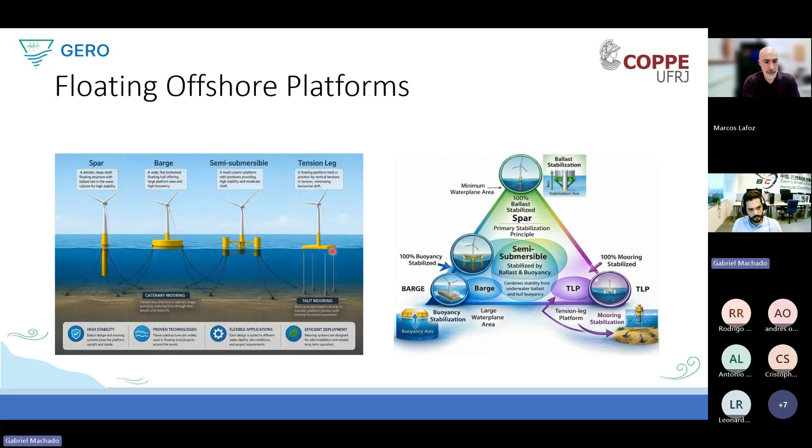So this way, of course, we have mixed these concepts into different kinds of platforms, but these four are the main four types of platform. And we also have the different types of mooring systems, that is the catenary system and the taut mooring system. The taut mooring is the one that is the tension leg that is stabilized via the mooring system.

A little bit about the wave energy converters. We have mainly three types of wave energy converters. We have the oscillating water column. That is, we have a system that has two parts. One is inside the water, a small part here that is a column of water, and we have a little part here that is the air chamber.

So when you have the waves, they oscillate this column of water here inside. When we have this oscillation, the air inside the air chamber gets pressurized and generates the airflow through this air chamber. So when the water goes up, it pressurizes the air, so the air goes out. When the oscillation goes down, it depressurizes the air chamber, so the air goes inside.

So this way we have this water that oscillates in upward and downward direction and generates this airflow inside the oscillating water column. And this airflow drives a turbine here that can be a Wells turbine or a radial impulse turbine, many different turbines.

We also have the point absorber type, the buoy here, that is mainly a buoy that oscillates with the waves, and it's connected to a power take-off system. That is the mechanism, the device that converts these oscillations of the buoy into the actual power to deliver to the system. And we have the overtopping device, which is a little bit less common.

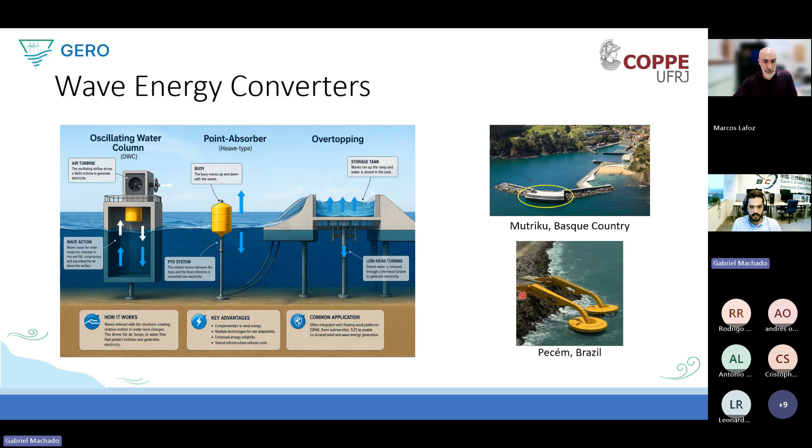And here I brought two examples that we have in the world. We have this Mutriku power plant, an OWC that I think is the most famous one, located in the Basque Country. And we have this other type in Pecém here in Brazil, that was developed by my advisor, Professor Segen, and it still works, and it's a very innovative concept too.

A little bit about the hybrid concepts. When we think about hybrid concepts, we mix two different technologies to produce power. So we have the primary one, the wind turbine, and we mix this wind turbine with different ways to generate power. I brought here the mix of wind power and wave power, but we can have solar, we can have different concepts too. I brought these concepts because they're the most famous and most conventional ones.

Almost all of these are semi-submersible with different technologies. We have this point absorber here, different types of point absorbers. This one is a torus-shaped point absorber. So these three are all about the buoy, different kinds of buoy, but all three are point absorbers. We have this one in Spain that is an oscillating water column mixed with the semi-submersible.

We have this one that was one of the primary ones, using the surge movement. So we have the surge movement of the platform generating power together with the wind turbine. And we have this concept here that is the one I studied when I spent my time in Italy, my internship in Italy.

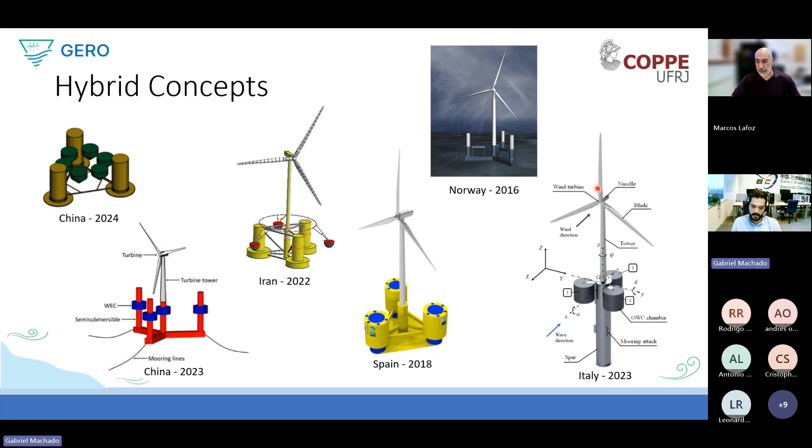So now the real topic of this seminar is about the methodology that we use to simulate these kinds of platform. We have to think that when we want more accuracy in the tests, in the simulations, we will get more computational cost. So when we get more accuracy, more fidelity, we have more computational cost. It's always like this. So if you have the simple methodologies, linear frequency domain models, we have a very low computational cost, but we have not too much accuracy.

So we have these kinds of linear frequency domain models that are based on the potential flow theory with Morison elements. We have the BEM, the blade element momentum, to simulate the aero part. And we can improve this methodology a little bit when we go to the time domain models. So we have partially or completely nonlinear coupled time domain models that are based on potential flow theory and Morison elements. We can combine these two together, and we have in the aero part the boundary element methods and the free vortex wake to simulate these time domain models more accurately than the other one.

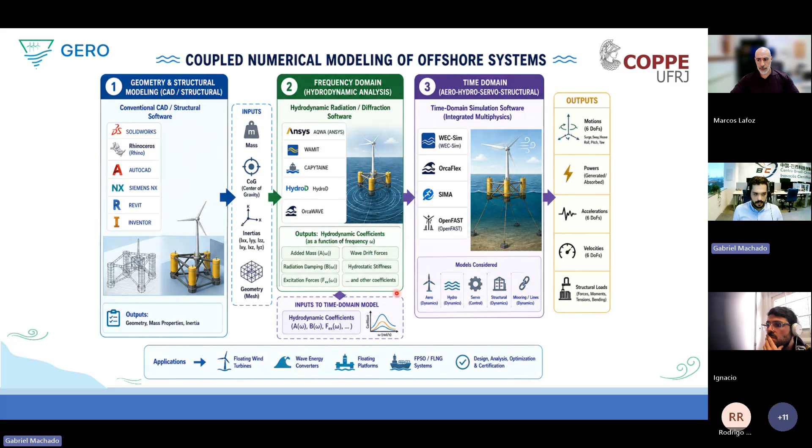So these models can be uncoupled or coupled models. So when you have the coupled model, it takes into account the aero part, the hydro part, the servo part, that is the controller, the structure, and the mooring lines all together in the same model. So this is the basics of the coupled numerical modeling of offshore systems.

So to talk a little bit more about each of these models, the first one is the structural model. When you want to create the structural model, we have to create the whole system, the whole platform that we want to simulate in one of the softwares. For example, here I use SolidWorks to model this platform that is a concept created by our group, GERO. And we have to model the whole platform with the internal structural configuration. We can put the material properties to see the correct mass of the platform.

So this way we can have also the structural model, we can have the loads, and we have to create all of these separately. For example, I can create the whole platform with one material, and we can create the ballast model separately. For example, here I create the ballast in water in the platform in concrete. So we can create these different materials to get the correct value of the mass, the COGs, the inertias. And we also have to create the tower model. We have to have all the positions, the mass for the tower to correctly implement this in this model.

So here I showed you a very small picture of the hybrid system that I work on. It is the conventional platform, that is just the wind turbine platform here, combined with the wave energy converters. So we have here one model that takes into account one OWC inside the columns, and another concept that takes into account the OWC external to the columns here.

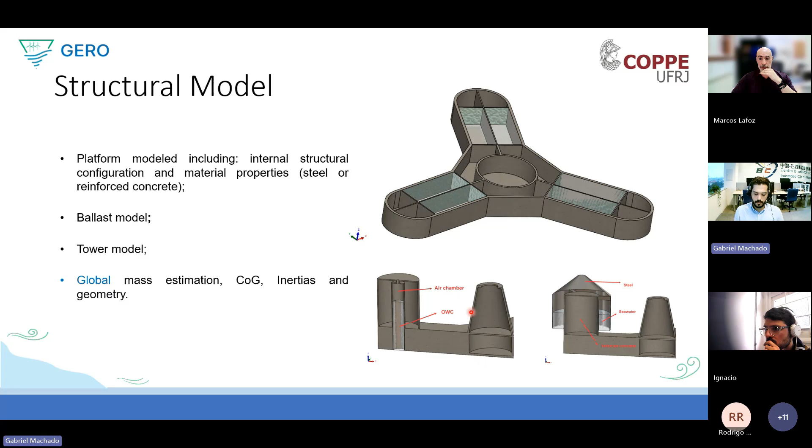So here I have three different materials. So we have the platform that is the concrete, we have the seawater here that is the oscillating water column, and we have the chamber here that is the steel. So when we put all of this together, we can get the global mass estimation in the correct form, the COG, the inertias, and the geometry in a correct way. We don't need to estimate anything. We have the correct values of all of this.

A little bit about the hydrodynamics. We have different methodologies. We have the low fidelity model, that is the first one that I mentioned before, that is the frequency domain model. We solve this equation here, that is based on the frequency of the waves. So the low fidelity model takes into account this. All of the software solve mainly this equation here.

And we have the medium fidelity, that solves this Laplace equation that is based on the Navier-Stokes equation, but we have to consider that the fluid is inviscid. This means without viscosity, incompressible and irrotational. So when we consider the Navier-Stokes equations and we put these parameters here, we get the Laplace equation, and we have to solve this Laplace equation to solve the time domain model.

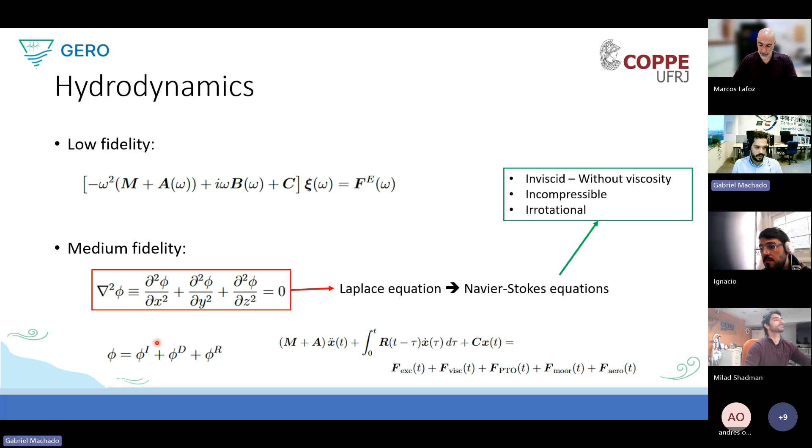This equation goes into another one, three different equations here, that when you solve them, we get this famous equation here, the Cummins equation. That means this one here.

So we have the potential theory, this equation here that takes into account the incident waves, the diffraction waves, and the radiation waves. When we solve this equation, we have the frequency domain problem solved. This means AQWA, for example, when we want to solve the diffraction radiation problem, solves this equation here, with these different incident waves, diffraction waves, and radiation waves.

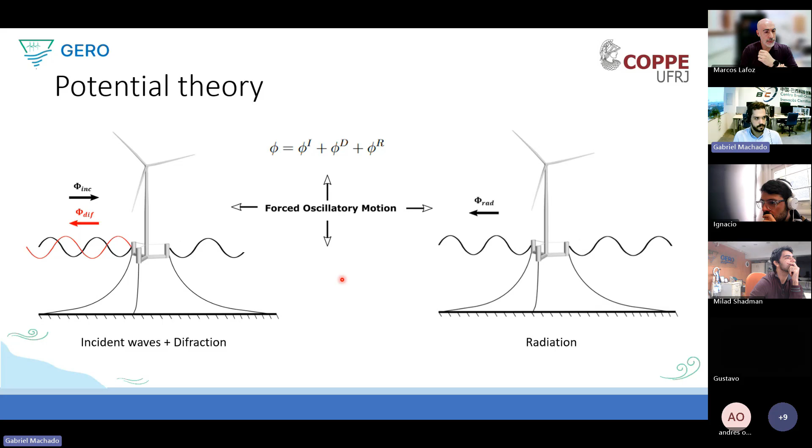And when we go to the time domain, we have the hydrodynamics in time domain, that is the Cummins equation, the basis of the coupled model. This means we have the mass properties here, and it's based on Newton's second law, that is mass times acceleration, we get the forces. So this takes into account all the forces that we have in the system.

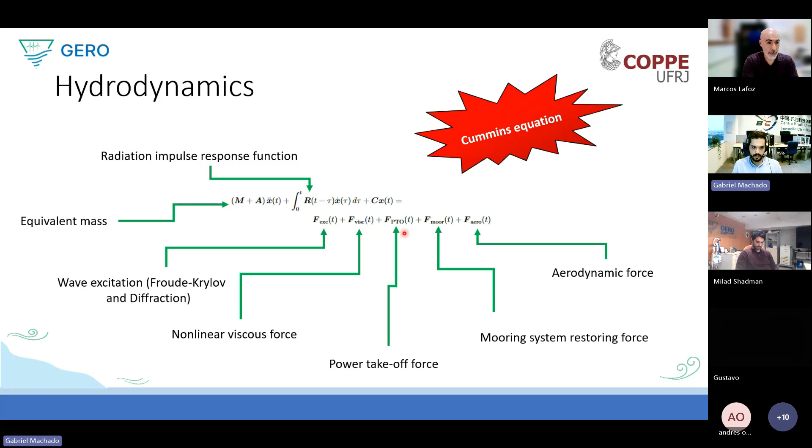So we have the excitation force, the nonlinear viscous force, for example, the Morison elements. We have the PTO system, the force applied to the wave energy converter. We have the mooring system that applies force, and we have the aero forces, the basis of the wind turbine. So when you solve all of these together, taking into account all of these forces, we can have the coupled model in the whole time domain.

So a little bit about the forces. When you have the viscous force, for example, we have to think about the linear damping coefficient and the quadratic damping coefficients. And depending on the model, we can also have the Morison elements to take into account the Morison elements' viscous forces too. So when we have the fully coupled model, we can put this force here to consider these Morison elements.

And for the PTO force, one example is the pressure force, the force that the oscillating water column exerts on the platform, and we have this pressure force because the air is pressurized in the air chamber of the oscillating water column. And we also have the viscous force because of the PTO too. So we have the water that oscillates in the chamber, and we have to take this viscous force into account too.

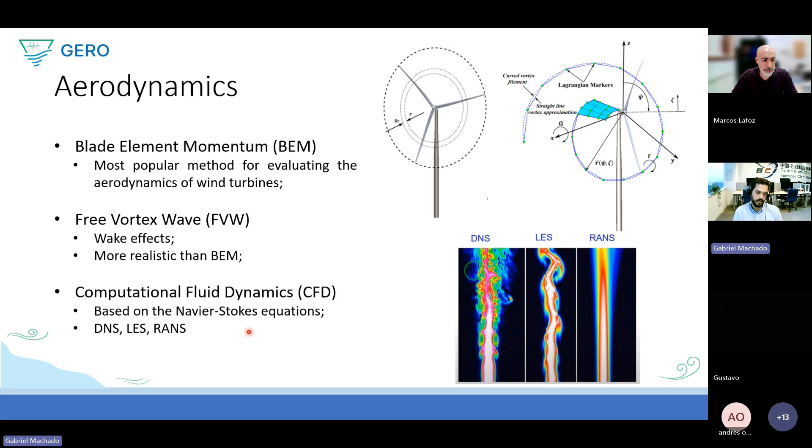A little bit about the blade element momentum. We have the blades here. We can calculate the lift and drag forces. I won't go much more into the equations here, but just to explain that we have mainly 4 different equations: the lift and drag forces here, and the thrust and torque equations here.

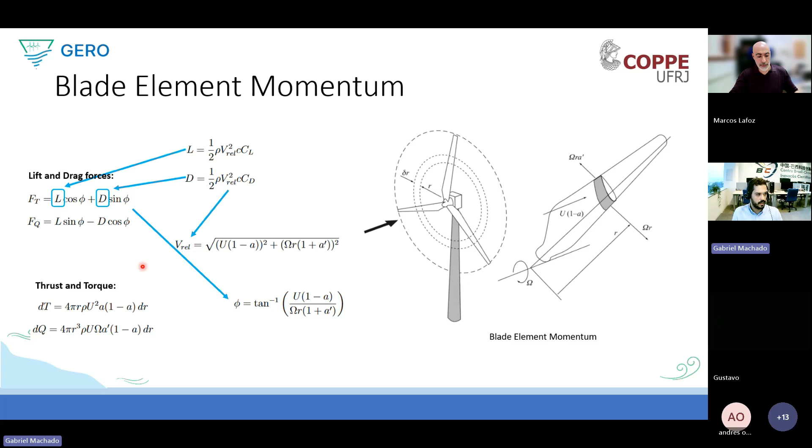That is, we can have this all calculated into tables that we can use in a linear model, or we can calculate this for each time step, which is a little bit more complex and a little bit more costly. So we can calculate all of these for each time step to have more accuracy in our model.

And about the CFD, as I mentioned before, the Reynolds-averaged Navier-Stokes models all the turbulent scales, all the vortex here. The large eddy simulation solves the larger turbulence scales and models the small ones. And the DNS solves all the turbulent scales. When you're solving the turbulent scales, it's more complex, more costly, and more accurate. So we have these 3 different methodologies to solve these different scales of turbulence in the system.

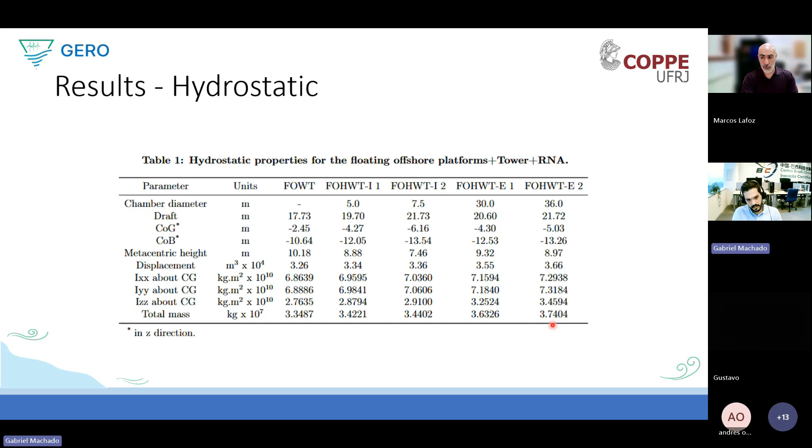And we can also have the inertias and the total mass of the whole system, considering the platform, the tower, the blades, the nacelle, the rotor, everything considered here for the total mass of the platform.

When you go to the time domain model, things get more interesting, because we have a lot of different kinds of results. We can calculate a lot of different things. We can have the displacements of all the system. If you consider, for example, this system here, we have different bodies. We have one body that is the platform with the tower and the wind turbine, this oscillating water column here that is another body, and these other two here, one in front of the other.

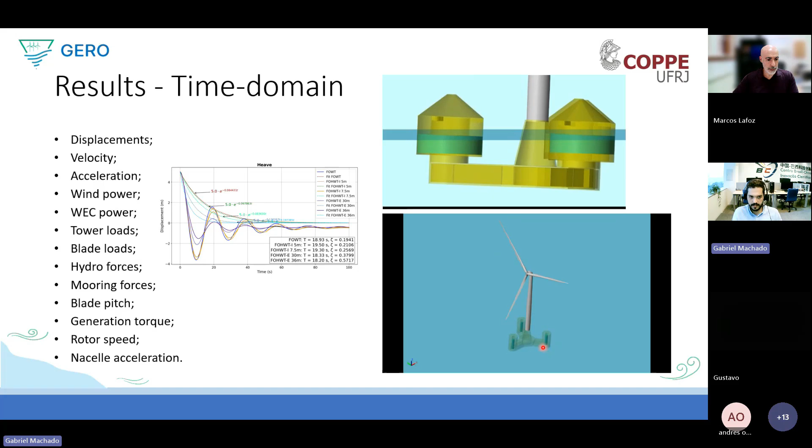And finally, the experimental tests. We can have different methodologies, but this is a little bit complex, because when we want to test the system experimentally, we have to think about the numerical model and the physical model. The hydrodynamics and the aerodynamics have different scales. For the aerodynamic model we have to consider the Reynolds scale, and for the hydrodynamic we have to consider the Froude scale. These two scales are not fully compatible.

So we have to decide whether we have the aerodynamics in the numerical model and the hydrodynamics in the physical model, or the opposite, the aerodynamics in the physical model and the hydrodynamics in the numerical model. We have to separate this into the simulation part and the wave tank part. In the first case, the simulation considers the aerodynamic forces, and the wave tank does the actual experimental part of the platform model. So we have to consider the scale parameters to match all of these systems.

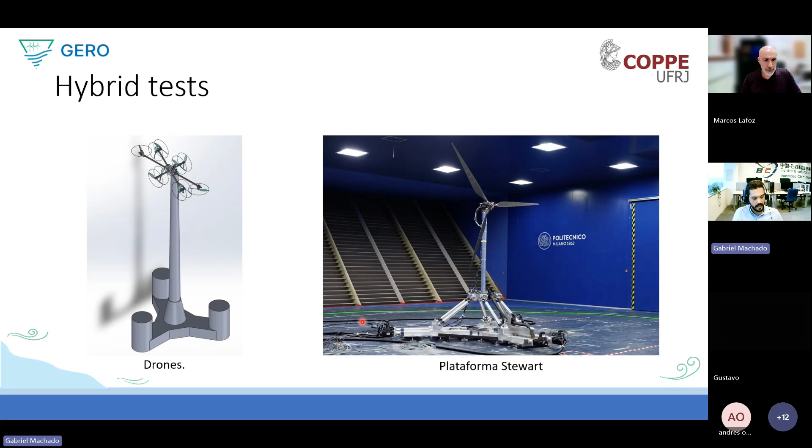And we can also have hybrid tests. That means we have one platform here with drones. We have the simulation of all the aerodynamic part, we get the loads, the forces, the moments, passing them through these drones that simulate the behavior of the blades. And we can also have the opposite: the actual blades, the actual wind turbine, and a platform that simulates the displacements, the movements of the platform. So we have these two different methodologies to simulate this.

And the most advanced one is the distributed tests: two different laboratories with simultaneous physical representation. One is the hydrodynamic laboratory that simulates the hydrodynamic part, and the other laboratory simulates the aerodynamic part. These two tests occur at the same time with real-time communication and synchronization. With physical tests in both the hydrodynamic and aerodynamic approaches, we have the most advanced method to experimentally test these kinds of platforms. But this is a little bit difficult. It's a very new methodology, so we're still planning, still thinking about this.

I think that's it. I don't know if I went too fast, but I think that's it.

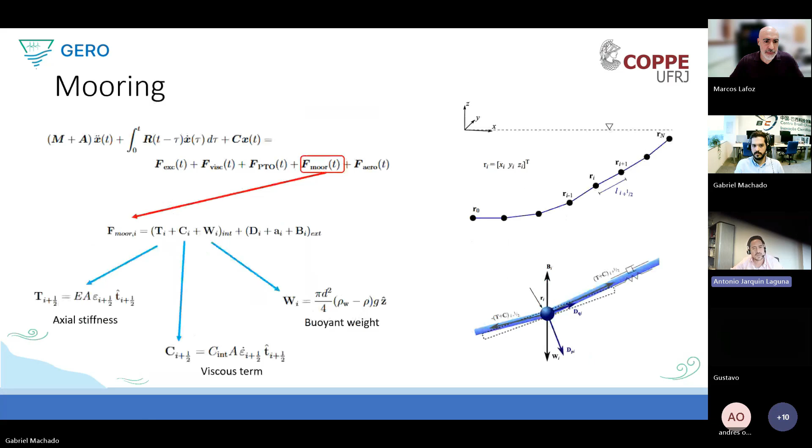My question or comment would be, because you present all the different subsystems or submodels that need to be integrated, and for each one you can have different levels of detail in the model, from lookup tables to more dynamic, and so on. So for me, the most interesting discussion, and maybe for the rest, is how the uncertainty of each of the individual models propagates into the overall uncertainty of the results, because maybe the wrong model selection on one of the subsystems cascades independently of the more detailed model.

So can you say something about how this level of modeling detail in each subsystem influences the overall model uncertainty? Yeah, this is a very interesting topic. Part of the next steps of my PhD is which module is best to go more into detail. For example, if we have a CFD analysis in aerodynamics, but a linear frequency domain in hydrodynamics, how this propagates into each other, which one we have to detail more, is part of my next steps.

I didn't do this yet, but it's in my mind to see which one we have to get more into detail, to see which one propagates more into the whole system. But it's a very interesting topic. Thanks, Gabriel. And maybe interesting to mention also which level we are happy with, right? Because maybe for what we need, we don't necessarily need a certain scale.

And also with the experiments, right? Because in the experiments there's also a level of uncertainty. So where is the balance? But when you have more accuracy, you have more cost. So we have to balance all of this. Indeed. But thanks, Gabriel. Thank you.

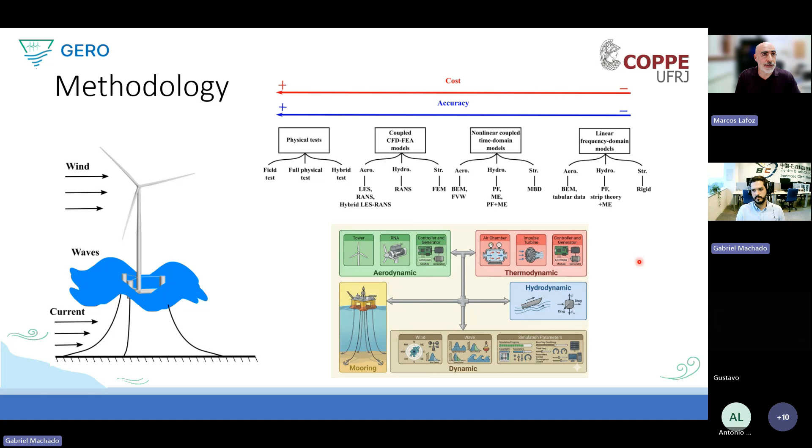Meanwhile some other people are preparing questions. I have a few of them prepared here. You mentioned the possibility to analyze through numerical computation the different parts of the system. In the methodology, you presented almost every system, but I would like to focus on the PTOs, because you also provided different types of PTOs depending on the system. Using the same tools you presented in the methodology, what level of accuracy can you provide for the PTO? Because it looks like a different dimension.

Yeah, here I brought these three examples because I work mainly with the WEC-Sim software. So these are the three different types that I can simulate very fast. These first two, hydraulic and direct drive, are already on the website, so everybody who wants can go there and see how this can be implemented in the system. I don't know if I understand your question very well, but the direct drive is mainly with the point absorber type, and the air turbine is more in oscillating water column devices, because we have to take into account this airflow.

Well, my question was mainly focused on the idea that you provided very accurate models for the mechanical part and the structures and everything. But once you move into the PTO systems, and especially if you are considering WEC-Sim, that uses quite a general model of the PTOs, do you consider it enough for an evaluation of your system? Because it seems you put a lot of accuracy in some parts, but not in the other. How important is the PTO in the evaluation of the whole system? That was mainly my question.

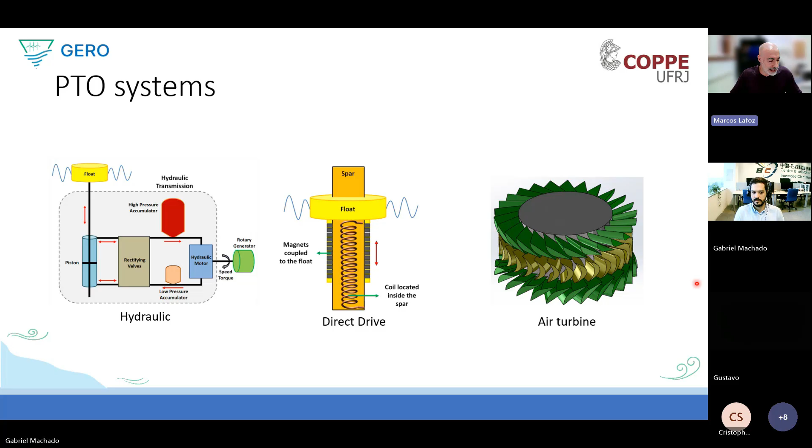Meanwhile, I have another question, and this is regarding one of your last slides, Gabriel, when you were talking about this distributed test, which is quite attractive to me, because I have tried to organize something like that recently. So I wanted you to say a few things more. Is this based on something you already know that has been working between several laboratories, or is it just an idea?

Yeah, I don't know how much I can tell about this in detail, but it's a concept that we are thinking about for the next years. We still have some projects, some ideas to build this, but it's in our plans. It's a project that's still in process. But we are thinking. It's not just a methodology anymore. It's real. We can construct this.

We can think about two different laboratories, physical laboratories, and put these together, synchronize these two different laboratories together. Okay. I think we are going to talk about this in the near future, because I have to tell you that there are some initiatives already done, at least in Europe, and I have some references I can share with you. I have also been doing some checks with people involved in real-time communication, in order to check what is necessary to ensure the proper synchronization.

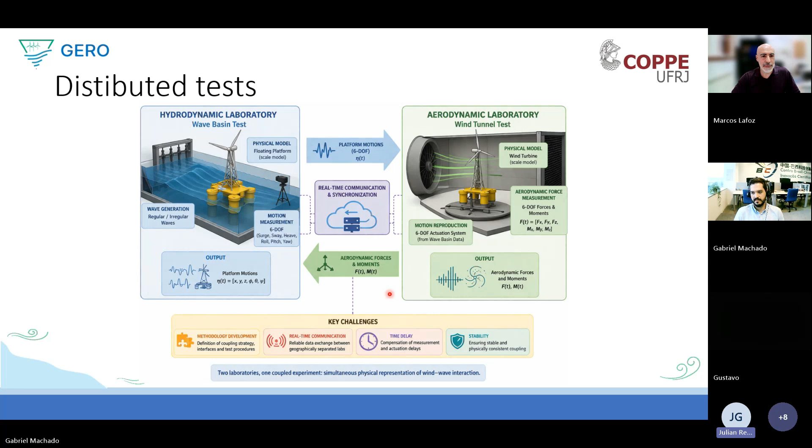Hello, I have a question for Gabriel. Yes, go ahead, Julian. First of all, Gabriel, thank you for your presentation. This is very valuable for us that are starting this work. And my questions were on the slide of frequency domain, about the radiation damping.

The first question is: is this component of the dynamics, the radiation damping, wholly estimated by the hydrodynamic damping, or do you consider other components of this radiation damping, like by the anchor system or by the soil? That's the first question.

No, in this frequency domain model, we didn't consider the anchors yet. For these types of simulation, we consider the radiation damping, that is the platform's natural damping, for example. It's all calculated in the software. We give the inputs and it calculates automatically. It solves the equations and gets the radiation damping. Okay, sure.

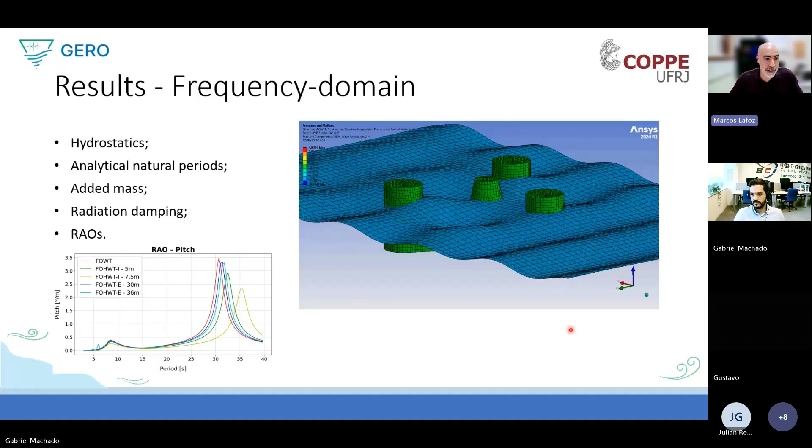Okay. I think we can conclude here. First of all, thank you to Gabriel for preparing this very nice presentation for all of us. I think there are many important issues here. We have a reference for numerical computation of these systems, so we have somebody to ask in the network.